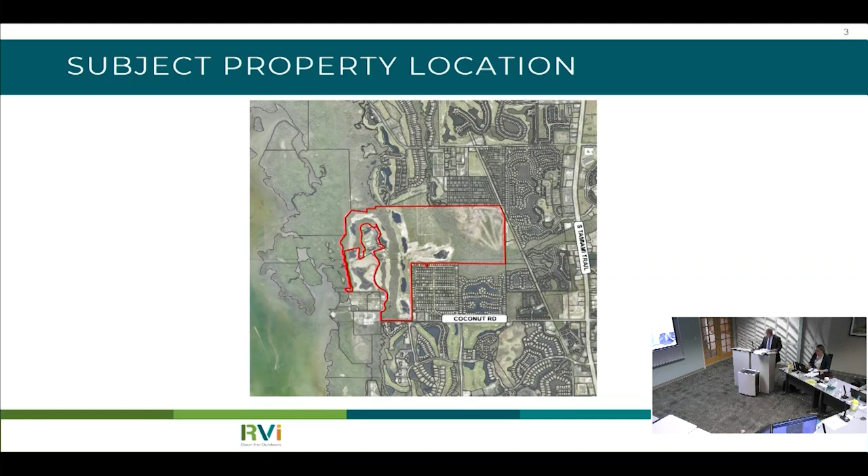The application before you today, it's actually two applications, but I don't think you'll hear the DRI portion today. You have an application to rezone 430 acres to a mixed PD. It's at the terminus of Coconut Road, on the north side of Coconut Road, outlined in red for you. The property is owned by the applicant today, so the acquisition of property is not conditioned upon any rezoning activity for the property.

Overall, the property is 430 acres. It's currently zoned the Kersey Smoot RPD and the Pelican Landing CPD RPD, and we're requesting it be rezoned to the Pelican Landing MPD. I expected there to be some public here today, but this is part of the Pelican Landing DRI. As you know, Pelican Landing has several PDs within it, and we're rezoning portions of two of those PDs to the Pelican Landing MPD.

I'm going to outline, and you'll hear in greater detail, this rezone to MPD modifies density that was originally allocated in the PD, and some intensity for retail, office and hotel. So there are additions and subtractions from the current PDs in the DRI. However, at the end of the day, you'll hear from Ted Treesh, and your staff agreed, that the modifications actually result in a reduction in trips generated from the PD, and specifically Coconut Road does operate at the adopted level of service with all of the additions and subtractions from the PD that you will hear about.

You will see, I believe staff will give you all of the emails that were received, and the primary concerns seem to have to do with traffic on Coconut Road. So we'll be providing you with testimony as to the impacts of what we're proposing, not only within the DRI, but also specifically on Coconut Road.

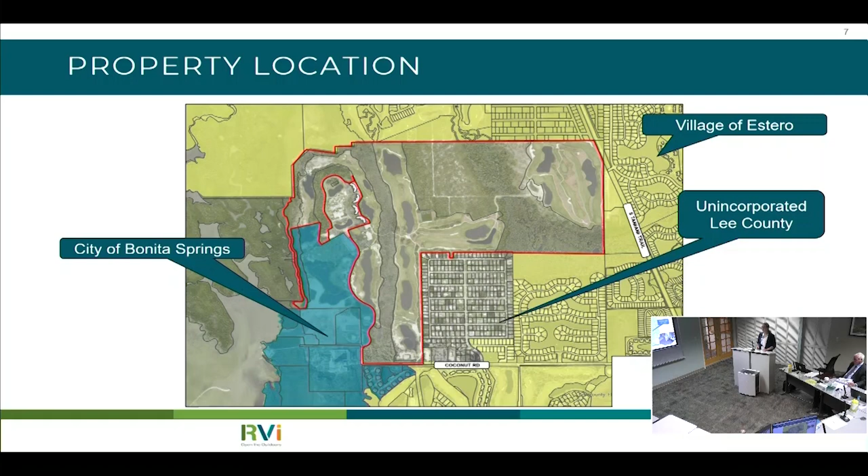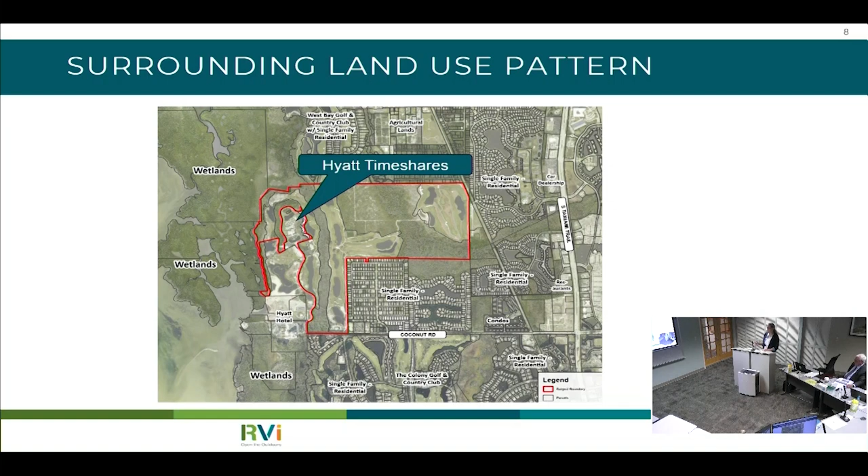Did I break it? No. Oh, I thought... So looking at the surrounding lands, kind of in the donut hole here is the Hyatt timeshares. This was part of the Kersey Smoot PD. We'll see that in a future slide. And that's not within the property.

This single-family residential over here is the Fountain Lakes community. To the north is the West Bay Golf and Country Club. This property here, one of the London Bay owned properties, is known as Raptor Bay. To the south of that, the Ritz residences — you may have seen those towers going up. Again, to the south of the Ritz is the Hyatt Coconut Point. To the south of Coconut Road is the Colony, made up of a number of smaller communities. And our neighbor to the southeast is El Dorado Acres.

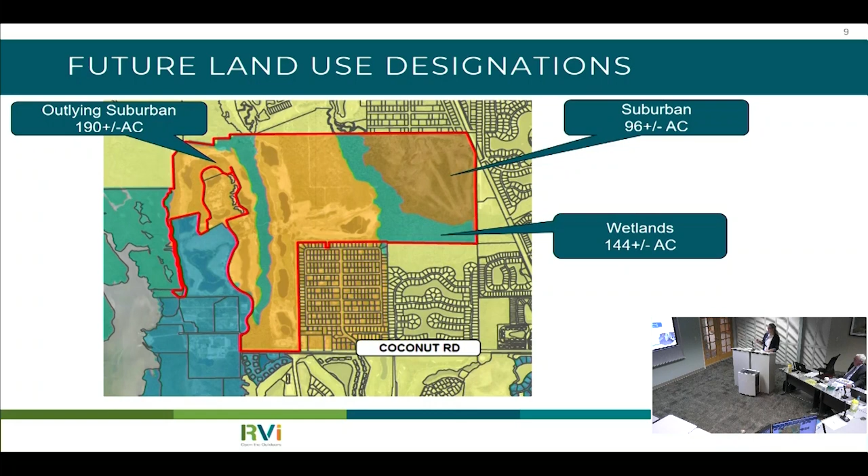So the calculation of that acreage — and actually this acreage here includes the Kersey Smoot acreage as well, and we'll get to why we're including both of those in a future slide. But including that Kersey Smoot donut hole, the calculation of allowable density in those future land use designations is 893 dwelling units. That doesn't include any density derived from any of the non-residential areas. You can see the breakdown of the wetlands as well.

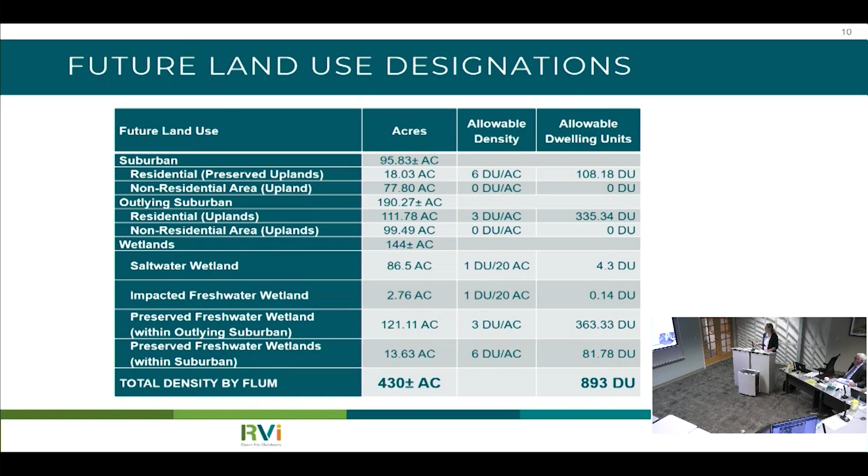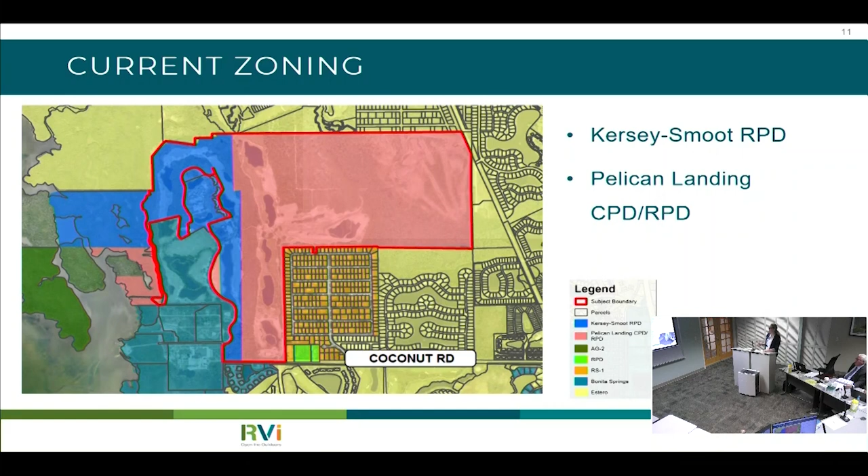Kersey Smoot was accessed by what is now known as Salt Leaf Boulevard, Coconut Point Resort. It's a private road. It included a golf clubhouse, the Hyatt timeshares, and some additional sales centers to the south.

It allowed for 362 multifamily units. 96 of those are currently built. The maximum building height in that PD is 75 feet.

Of the 362 total units allowed within Kersey Smoot, 241 of those units are now owned by the applicant today and have been assigned to the Pelican Landing MPD as we move forward. So they're unbuilt, but assigned to this MPD, available for development under this MPD.

Correct. So that leaves the Kersey-Smoot PD with 121 units remaining. 96 of those are built. There's an additional 25 units. So when you say 121 units remain within Kersey-Smoot, is that then outside this project? Outside of this project. In Lee County or Bonita Springs, but not part of this? In Lee County, but not part of this. Okay.

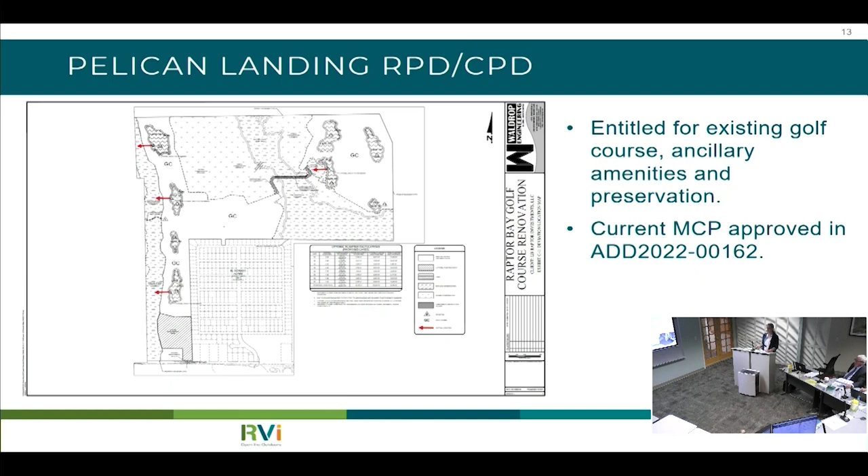So this is all just a part of the Pelican Landing DRI, as Rich mentioned. It's within the overall DRI, and that DRI straddles Lee County, City of Bonita Springs, and the Village of Estero. The DRI is made up of just two separate development orders, one in Bonita Springs and one in Lee County. That Bonita Springs covers all of the remaining lands outside of unincorporated Lee County.

There's been quite a few amendments over time, 16 previous amendments to the DRI. As we've mentioned, we have a companion DRI DO amendment to address the density changes that we're proposing through this MPD. And the majority of the rest of the DRI outside of the subject property today is already built out.

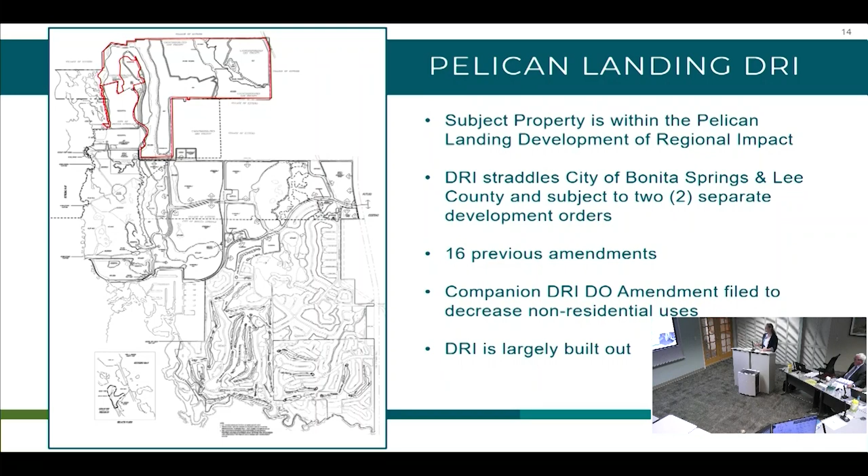So looking at the entitlements within the DRI, stepping away from today's PD, the total approved residential units are 3,912.

Of that, the total unbuilt entitlements for residential units, that's the 241 units from Kersey-Smoot that I mentioned just a couple slides ago. And that's going to be assigned to the MPD? Will be assigned to the MPD today.

I won't run through all the numbers, you have the presentation. But essentially, this column is the overall approvals, and the column to the right demonstrates what has been transferred to the applicant today. So in addition to those 241 units from Kersey-Smoot, they've also obtained some retail and office square footage as well. And that square footage is a part of what? Converted to other uses. I got that.

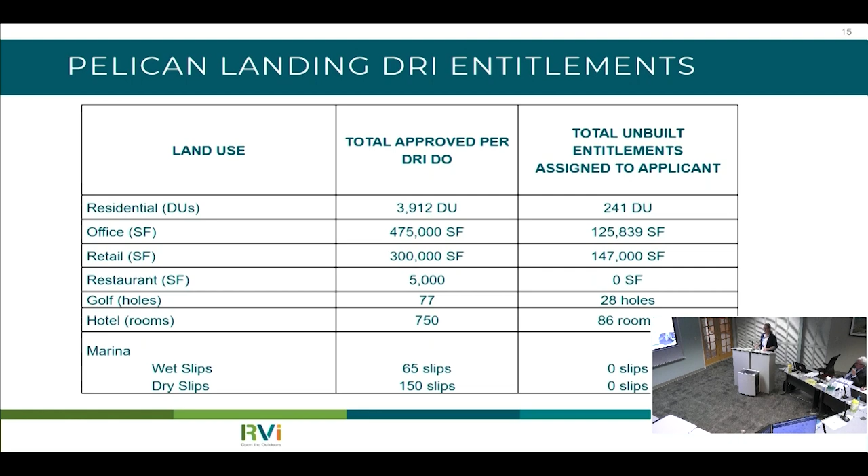Again, going back through the request overview today, for the MPD itself, the total dwelling units is 729 dwelling units. You'll see in the traffic report that assumes 100 single-family units and 629 multifamily dwellings.

The PD will retain 25,000 square feet of office uses. Again, 27 golf holes and 318 hotel rooms. There's also private on-site recreation and accessory uses as well.

The building heights vary based on the different tracts within the MPD, which we'll run through explicitly, but we have the highest heights of 290 feet more towards the west, and they step down as we go further to the east. So 290, 110, and 50 feet.

Oh, wait, go back? Sure. So these represent caps, right? Exactly. What's MU? Yeah, so on the master concept plan, we've got several tracts for development. The MU is the mixed use tract, and that's where we have the ability for those office uses. Retail office. Just office uses. Okay.

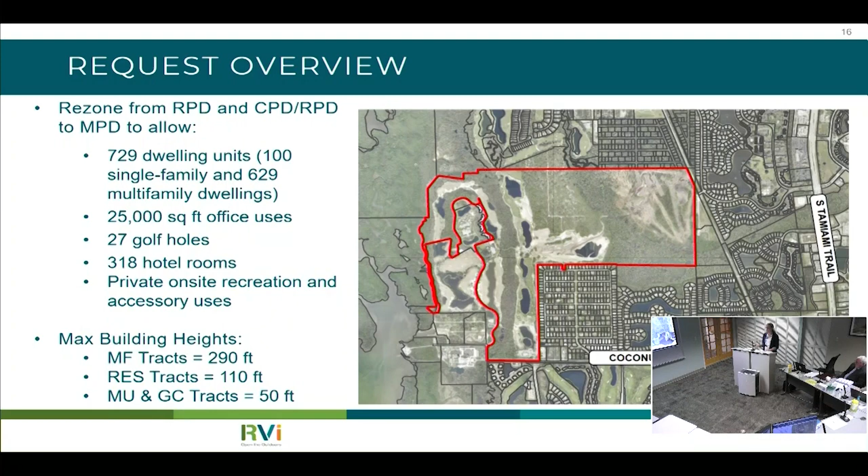I'll try not to get too in the weeds on this table, but again, we're looking at the overall approved DRI entitlements. This is the same column we saw on the previous slide, compared to the total proposed entitlements in the MPD.

And what that represents in terms of increases or decreases in the DRI. So the reduction in office and retail is allowing you to increase the residential and the hotel, but still keep the traffic below the original estimate? Exactly.

And we'll continue to look at that throughout the presentation. As we're looking at these numbers, this 729 includes the 241 dwelling units, and so that's why it is only an increase of 488 units for the overall DRI approvals.

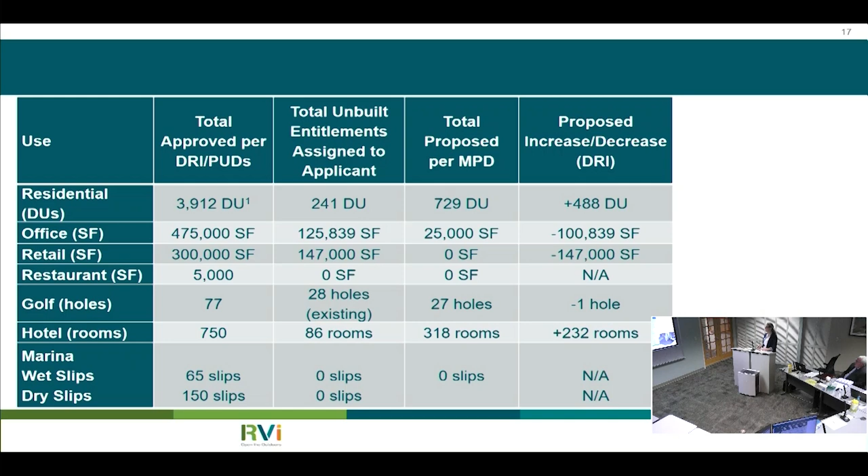I mentioned that the future land use designation table included the remnant portion of Kersey Smoot, that kind of donut hole. This is why we included that in the calculation, because as we're taking some lands out of Kersey Smoot and moving them into this Pelican Landing MPD, we wanted to ensure this entire area was still consistent with the Lee plan in terms of allowable density.

Again, you see this is that same table from before, a maximum of 893 allowable dwelling units. Between the proposed Pelican Landing MPD, today's subject property, 729 dwelling units, and the remaining 121 dwelling units that we went through, it's only a maximum of 850 units. So well within the allowable dwelling units in both of these areas.

Here's the master concept plan. Here's where some of the heights and the tracts will make more sense. Overall, you've got the MU tract, the mixed-use tract, adjacent to Coconut Road. We have a res tract, that's the 110-foot building height that you saw previously. And then the MF tract up here. The remainder is a mix of golf course, stormwater lakes, and conservation areas.

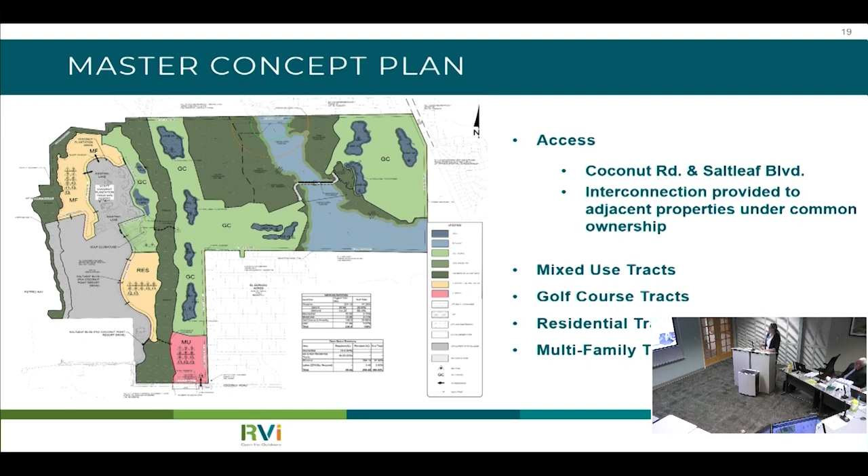We're going to go through some more elements of the master concept plan in the next few slides. So we looked at the proposed building heights in comparison to some of the building heights surrounding the property.

I'll walk through. West Bay has a maximum of 290 feet, which is the same as our MF tract. Raptor Bay, that piece adjacent to us, has a maximum of 20 stories over 2 parking. The Ritz Residences has a maximum of 286 feet. Hyatt Coconut Point, 213. Altaira, 249, and Navona, 254. So on our property within these tracts, you can see the 290, 110, and 50.

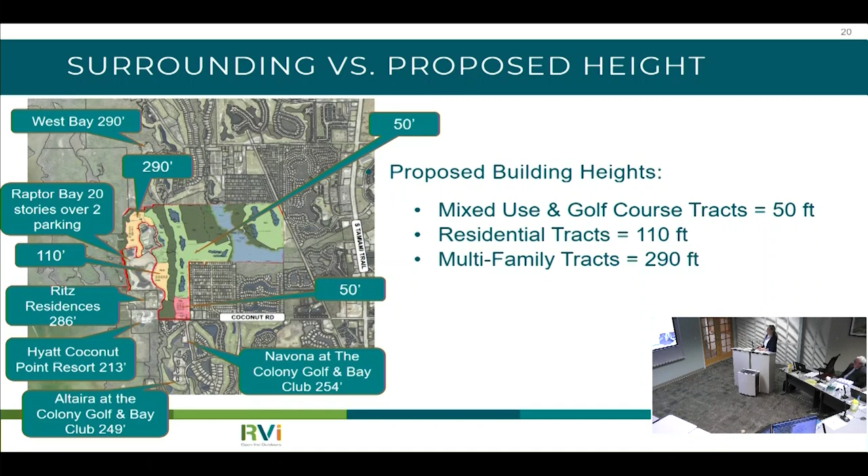Where are the single-family homes going to go? Those will be allowed in the mixed use tract. I see, thank you.

The buffers for the property, there's a combination here. Where there are preserves adjacent to surrounding properties, there's no buffer proposed. Where the golf course is adjacent to El Dorado and West Bay, we have a 30-foot type F. Those buffers are in place now. They were required as part of the golf course redevelopment. There's a maintenance road that runs along here, and so that type F was required for that maintenance road.

We have type D buffers along rights of way, along the private road here, and then along Coconut Road. And then as part of the staff conditions, we have a modified type B buffer between the mixed use tract and the El Dorado acres.

Sorry, a couple more things to point out here. I mentioned this is an existing flowway, so we have a 50-foot waterway buffer on both sides of that flowway. And then we have preserves that vary in width along the western side of the property that provide a buffer to the Estero Bay.

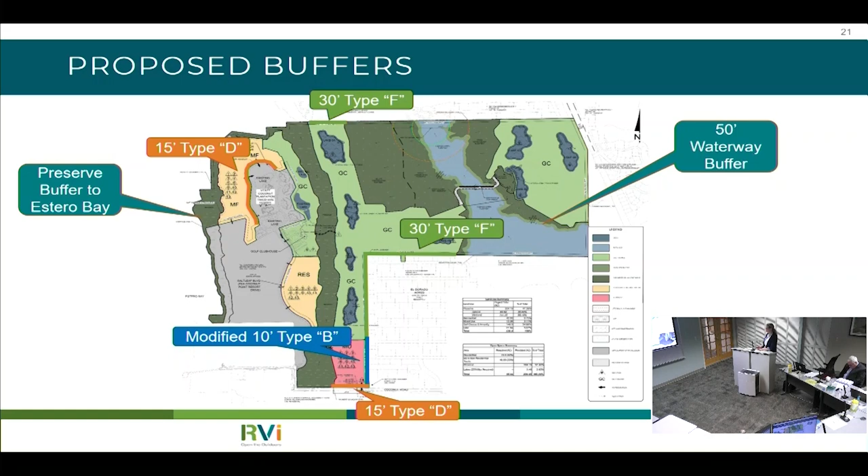In terms of open space, there are 65 acres required for the property, 204 acres provided. And again, I mentioned the preserves demonstrated on the map today are under an existing conservation easement.

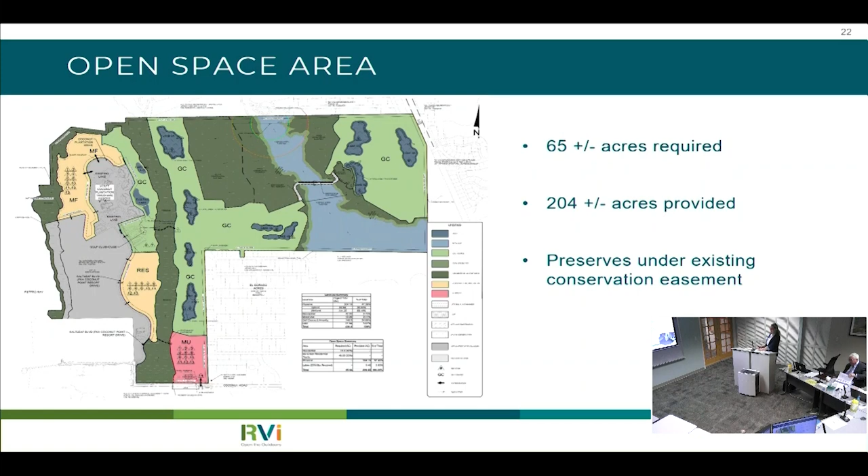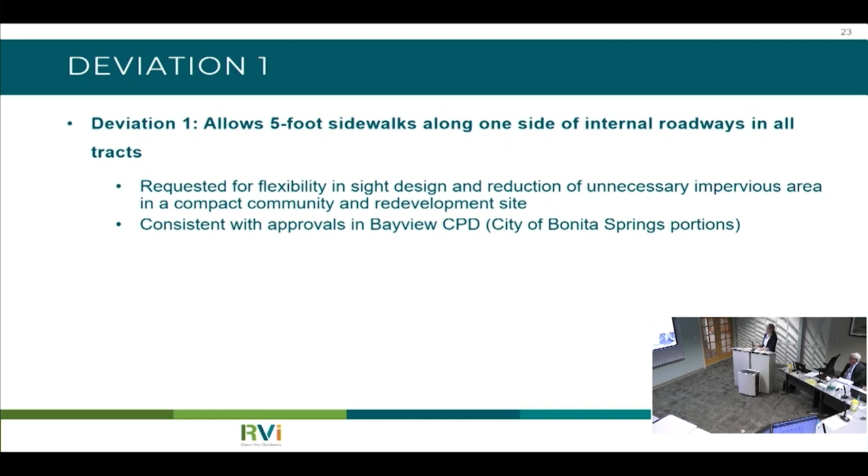We have a number of deviations that I'll walk through for the PD. Many of these have been previously approved for different PDs and ADs along the way, so I'll point those out when relevant. Deviation 1 allows for 5-foot sidewalks along one side of internal roadways. This applies to all of the different tracts, so we're just looking for flexibility in site design, and it's consistent with adjacent approvals in Bonita Springs.

Deviation 2 applies again to most of the tracts, Res, MF, and MU tracts, and allows for individual parking spaces to back onto the right-of-way to allow for on-street parking. This has been approved in the past for those two zoning resolutions.

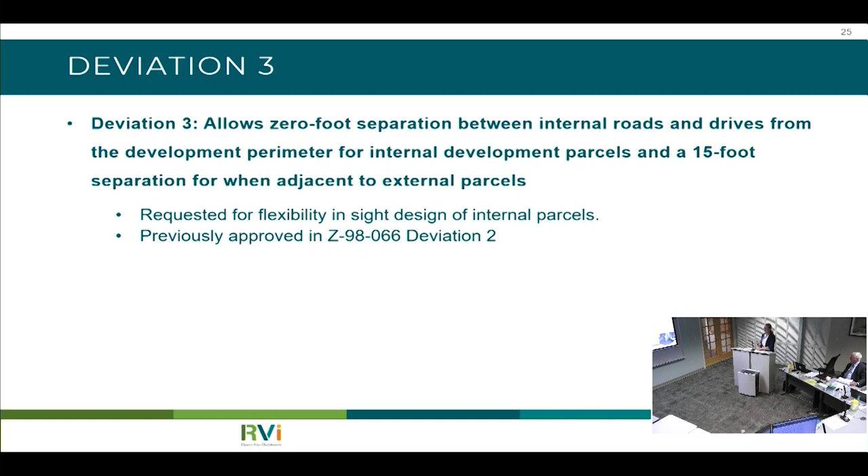Deviation 3 allows for 0-foot separation between internal roads and drives from the development perimeter, and a 15-foot separation when adjacent to external parcels. Again, looking for flexibility in site design and keeping the internal parcels a mixed-use environment, walkable and things like that. This has previously been approved as well.

Deviation 4 allows for a 0-foot setback for identification signs when sight distance requirements are met. This was approved previously and allows for consistent signage throughout the development.

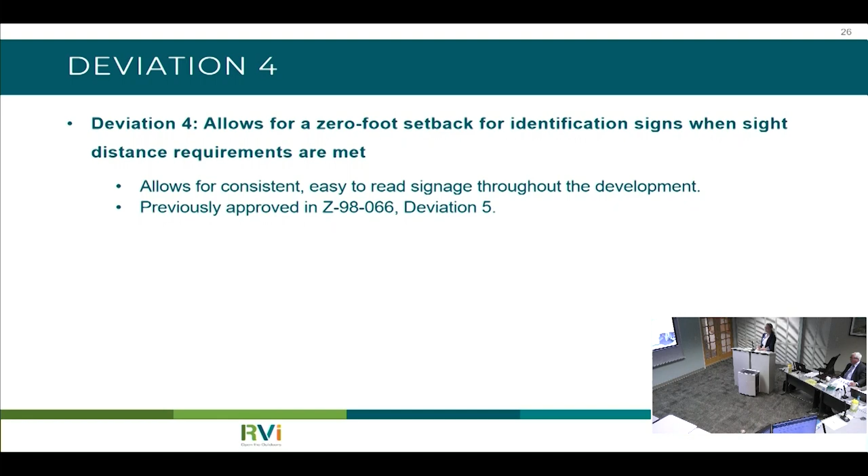Deviation 5, again, allows a 0-foot -- I think this one is wrong, it looks like a repeat. I'm going to come back to that slide at the end. Apologize for that.

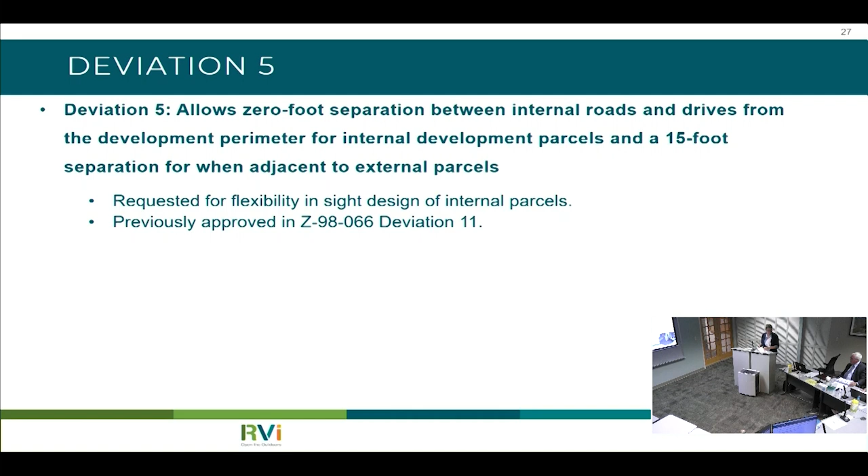Deviation 6 allows for a 4-to-1 slope on all lake banks in all tracks. That's currently approved for the golf course area, and we're expanding that to the remainder of the tracts within the PD.

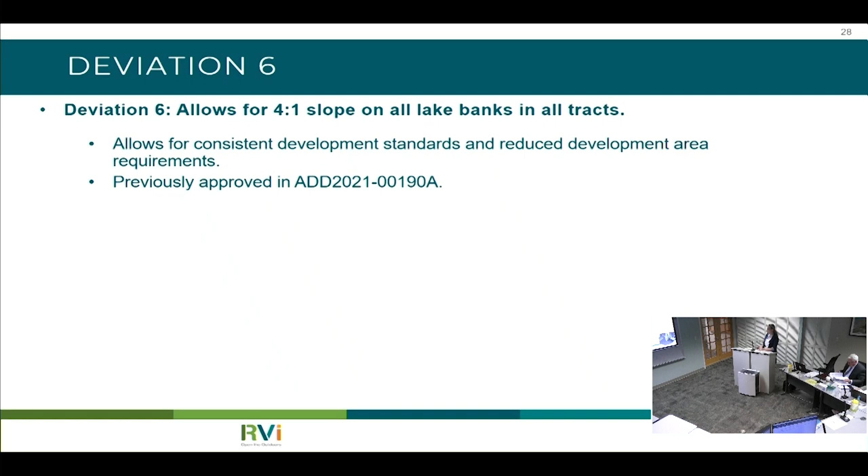Deviation 7 allows for a 5% reduction of the required spaces at the golf clubhouse only. This was previously requested for a reduction in unnecessary parking and approved in a past zoning resolution.

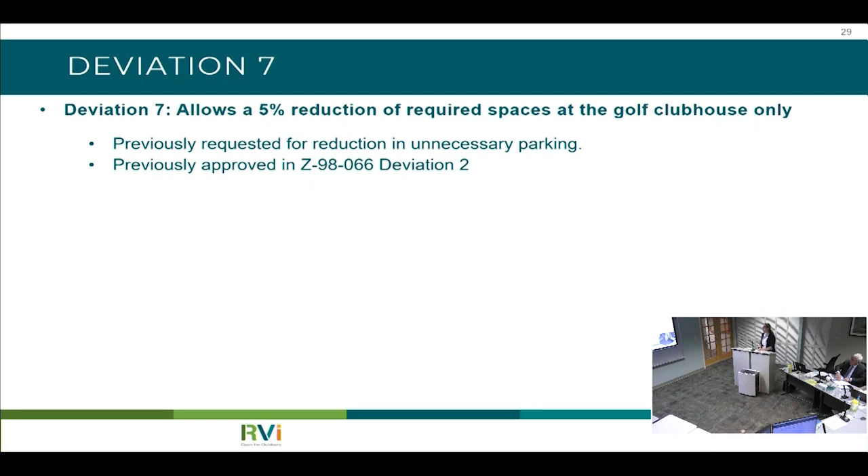Deviation 8 is addressing those maximum heights. The maximum height of 290 feet was previously approved in zoning resolution 94-014.

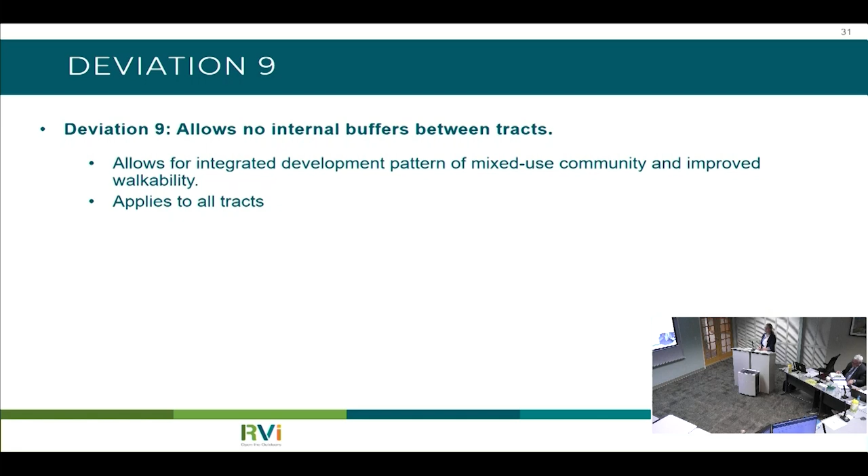Deviation 9 allows for no internal buffers between tracts. It allows for addressing that mixed-use walkability environment that we're looking for. This applies to all tracts.

Deviation 10 allows for the indoor recreation facilities to be parked at one space per 1,000 square feet for those private facilities, where those facilities aren't open to the public and just to the residences. It's intended to reduce the parking that would be required. Some of these facilities will be located within towers, and so obviously don't require trips to get there for the residents.

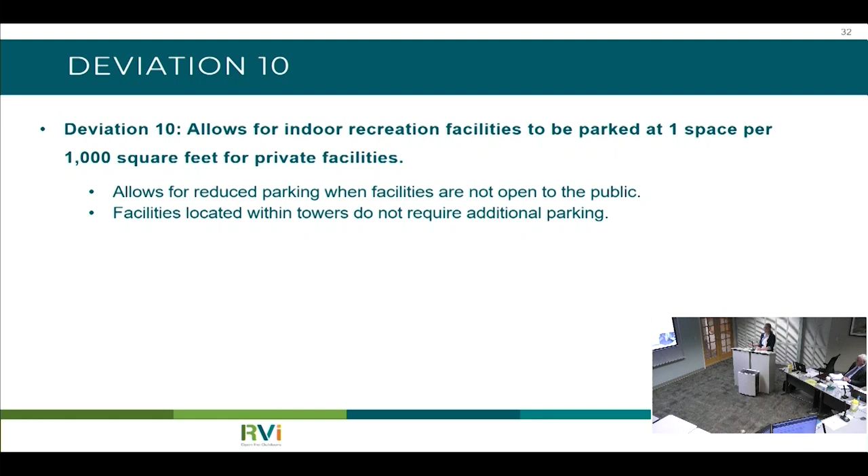Deviation 11 allows a 0-foot setback when adjacent to other tracts within the Pelican Landing MPD, adjacent to the Pelican Landing RPD, CPD in Bonita, and the Bayview CPD in Bonita as well, and a 50-foot setback from the northern property boundary.

In this case, we're in agreement with staff's recommended changes to this deviation.

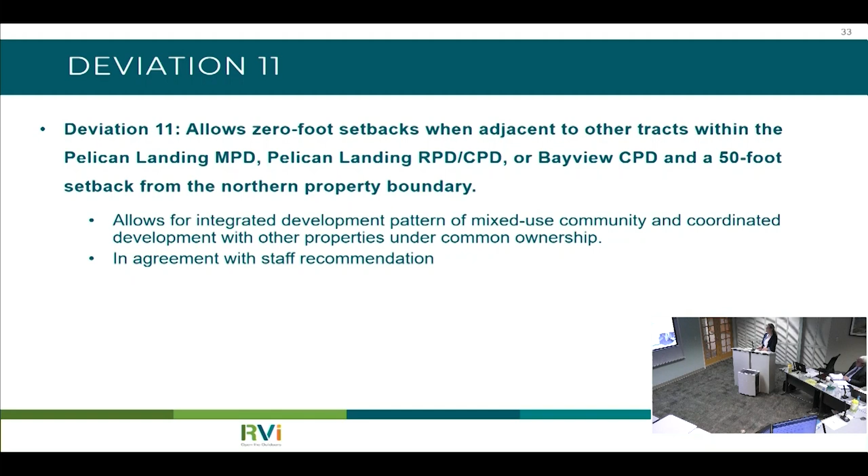Deviation 12 allows for a minimum separation of buildings of 35% of the sum of the buildings for buildings that are greater than 35 feet in height. This allows for some flexibility in the design of those towers. And we have a letter of no objection from the Estero Fire Department provided as part of your 48-hour notice.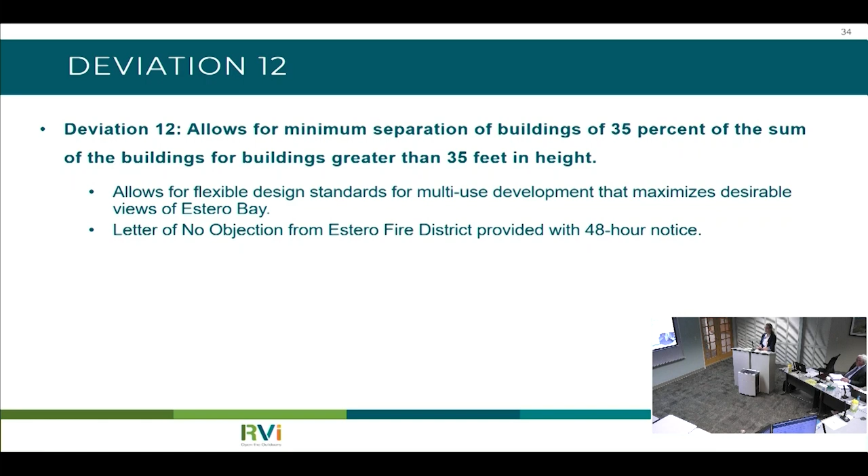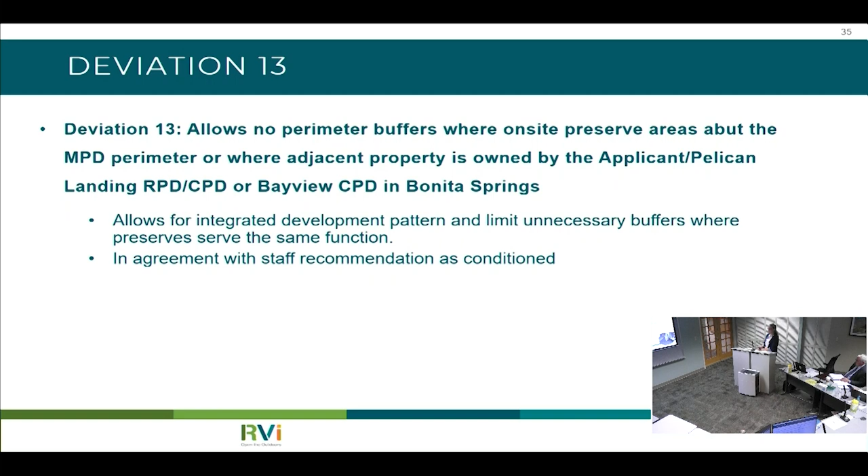With that, I'll turn it over to Shane Johnson for our engineering analysis.

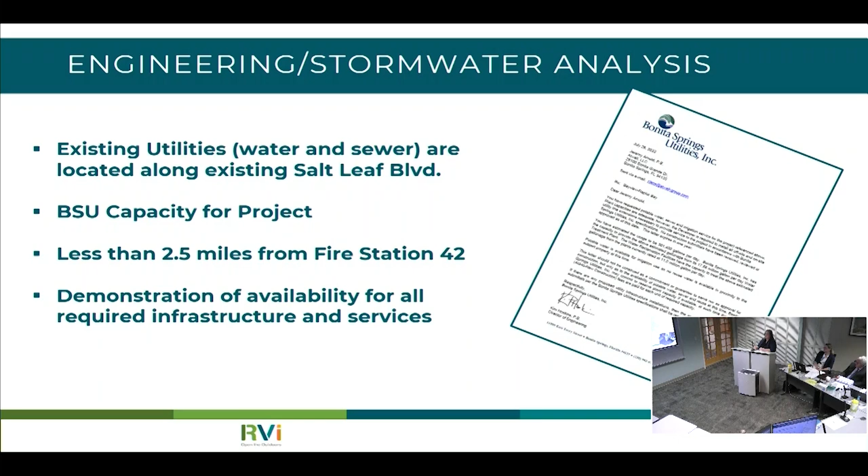So with water, sewer, and public infrastructure, the capacity for the plans that have been presented to you today is there. As far as water management, this is a nice one because we already have our ERP. We submitted a water management permit in 2022 for the proposed changes that London Bay is looking to make on the property. That permit was issued in October of 2023.

Since then, we've gone through countless reviews with the district, and the location of this project is such that it's near Estero Bay, impaired water bodies. So water quality and nutrient removal are the key things we have to look at, and those are the key concerns. With this project, 150% water quality treatment has been provided. We've done a very in-depth nutrient loading study for nitrogen and phosphorus removal. We've met with the district, we've gone through everything, and since then they've approved that.

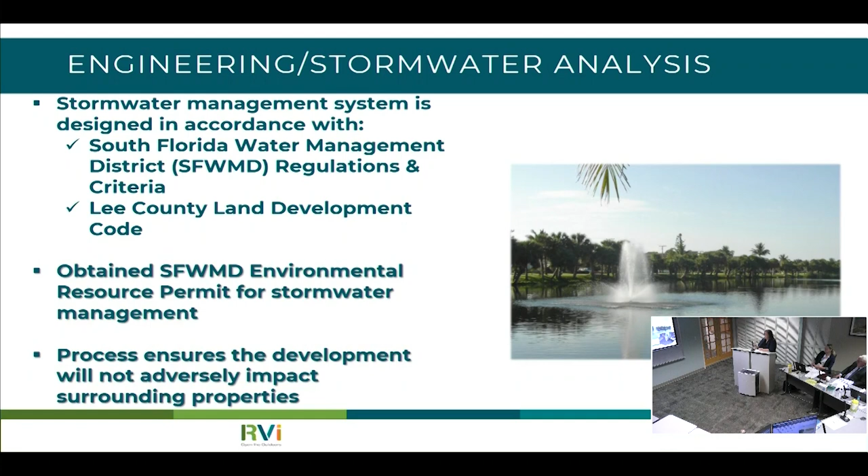For the project, the east side discharges into the slough system, which ultimately goes to Estero Bay. The west side discharges directly to Estero Bay. The water management system is set up so it's perimeter bermed. The runoff stays on the project, gets treated within the interconnected ponds with control structures, and then the treated water gets discharged through a series of control structures at a controlled rate.

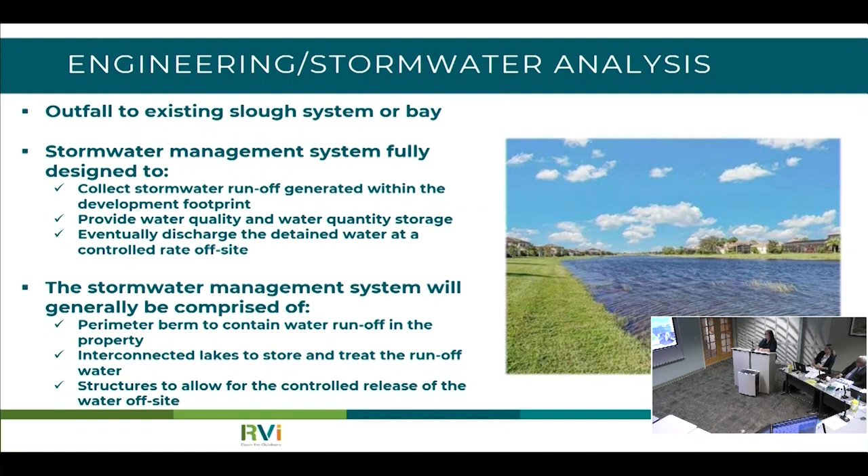We've gone through the review. The design meets all of the local Lee County criteria and the state criteria. We have the water management permit in hand, and it is my professional opinion that the changes they're making to this project will have no adverse impacts to the neighboring properties or the environment. Thank you.

Good morning, Ted Treesh with TR Transportation Consultants. We prepared the traffic analysis in support of this application. That's part of the record and has been reviewed by staff.

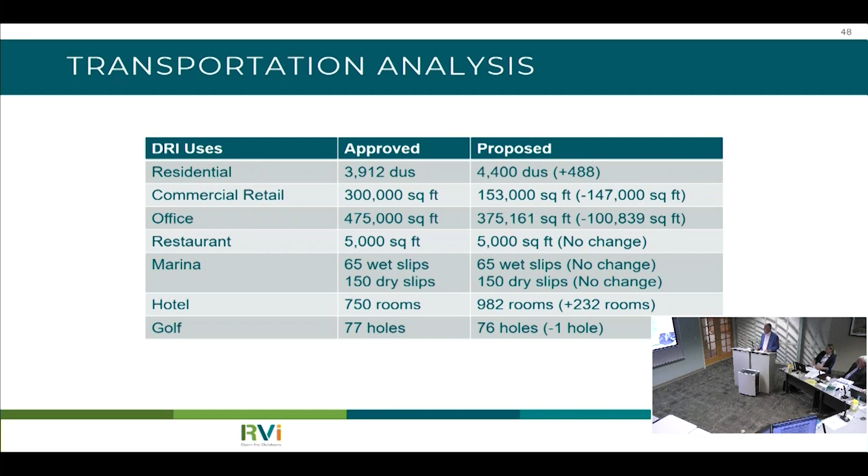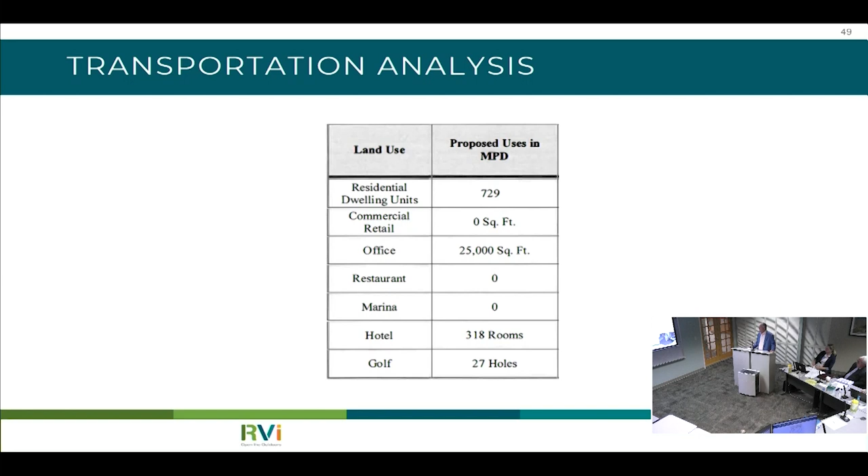So London Bay was very concerned, and we looked at the impacts to Coconut Road in furtherance of our analysis. This table shows, specific to this MPD, the impacts of the uses concentrated on the section to the west of this property that we analyzed. This table shows, in the overall DRI, the reduction in trips. So for the overall DRI, we're consistent.

This DRI goes back a number of years. There was significant transportation mitigation paid as part of the DRI. That's all been paid, and those mitigation impacts have been taken care of in terms of off-site transportation improvements. No additional off-site impacts are associated with this request - it was addressed as part of the DRI mitigation. We will be paying impact fees for the uses, as we do normally at the building permit stage, but there are no additional off-site impacts.

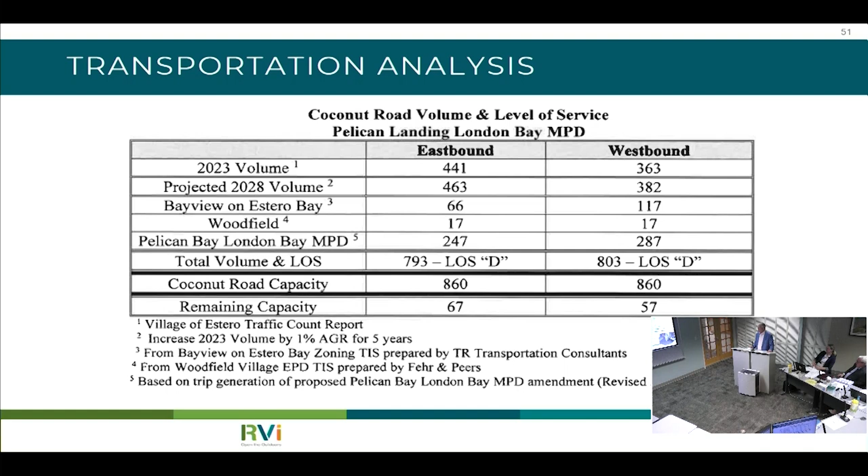Our analysis shows that we're consistent with the goals and objectives of the Land Development Code and the Lee Plan, and staff agrees with our analysis. That's all I have to put on the record.

One of the things this project also participated in was the funding of a traffic signal at US 41 and Pelican Colony Boulevard, which is the intersection just south of Coconut Road and US 41. The DRI, which we are part of, has funded the construction of a traffic signal at that intersection.

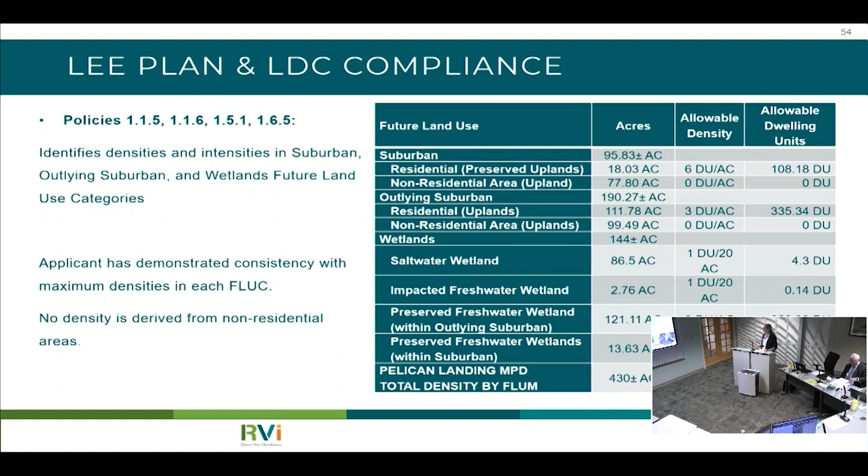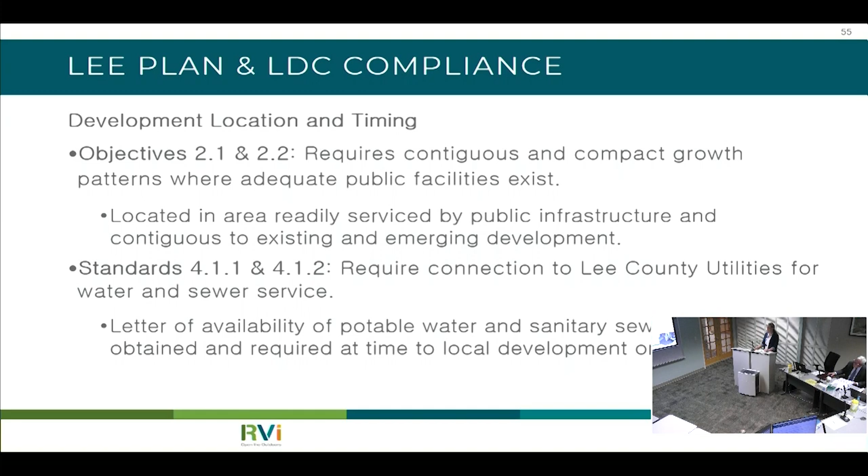Objectives 2.1 and 2.2 require contiguous and compact growth patterns. This is an area that's readily served by public infrastructure, and it's contiguous to a lot of existing and emerging development in the area. Standards 4.1.1 and 4.1.2 require connection to Lee County Utilities for water and sewer service. We do have a letter of availability for potable water and sanitary sewer.

Goal 5 is related to residential land uses. Policy 5.1.2 prohibits residential development where physical constraints and hazards exist. Policy 5.1.5 protects existing and future residential areas. So for these policies, we've walked through some enhanced buffering for the adjacent residential areas. We're, again, readily serviced by public infrastructure, and we have a letter of availability.

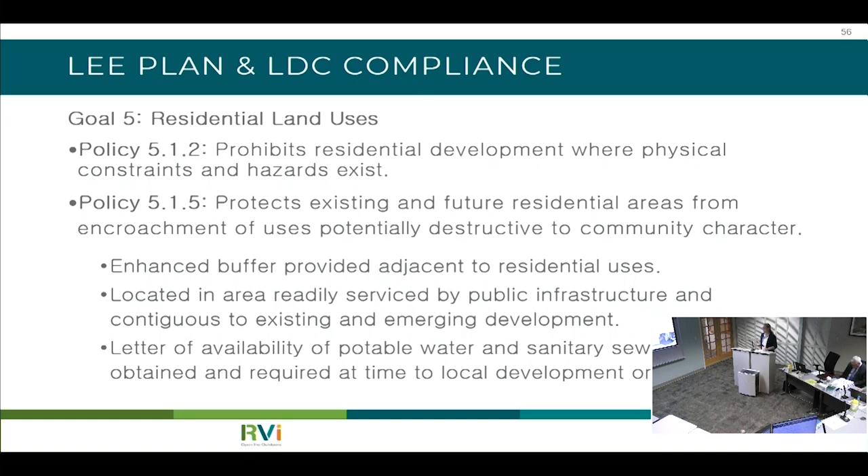The surrounding and proposed building heights are consistent. We've maintained our highest height consistent with some of the surrounding approvals. We've taken a step-down approach as you move more towards the single family adjacent to us. So our highest heights are along the bay, lowest where we're adjacent to residential neighbors.

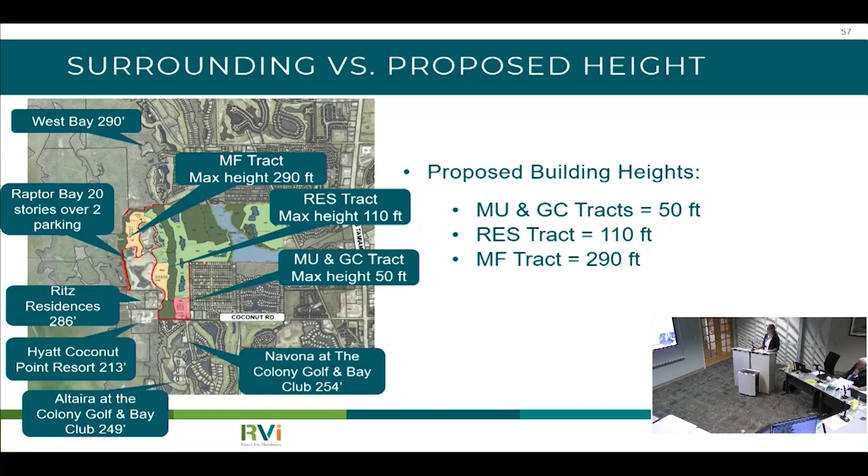In particular, wanted to look a little closer at this mixed-use tract where we have a maximum height of 50 feet. That is where we're adjacent to the El Dorado Acres subdivision. El Dorado itself allows for a maximum of 35 feet. This community here, Cielo at the Colony, is just to the south of us. That allows for a maximum of 126 feet. We also saw on previous slides that there's an enhanced type B buffer along the eastern property line of the mixed-use tract.

All right, you want to explain what that is? Yeah, so it's a type B buffer. It's a 10-foot type B buffer. All of the same plantings that you would see in a type B buffer, that's 10 feet. And what would that include? I don't have the planting requirements for a type B, but we haven't requested a deviation from those typical type B plantings.

Goal 6 is related to commercial land uses, so it addresses the review criteria for commercial development. In this case, we have provided for a reduction of commercial and office square footage in the DRI to ensure that there's no impacts to the surrounding transportation system. The buffers meet or exceed the LDC requirements, and the utilities are available from Lee County Utilities. Our maximum building heights, we've also demonstrated, are comparable to those surrounding.

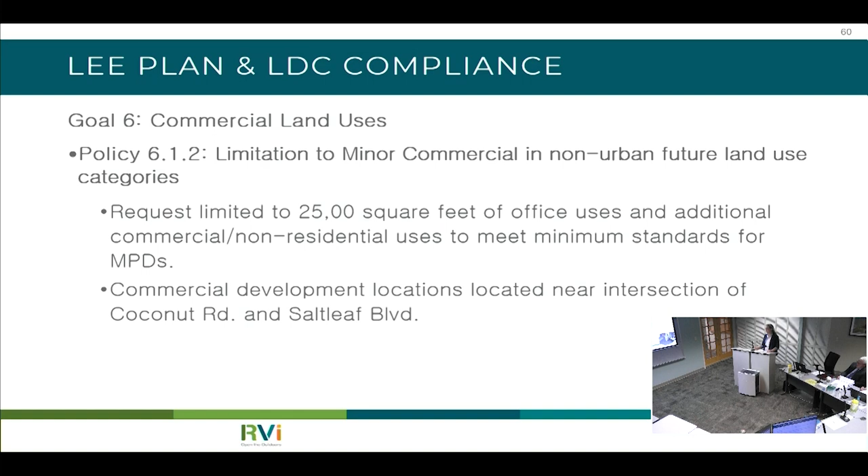Policy 6.1.2 is related to a limitation to minor commercial development within non-urban future land use categories. Our request is limited to 25,000 square feet of office. Well, you're really not in a non-urban classification—you're outlying suburban, that's an urban classification. The commercial development is also located, as Ted mentioned, near the intersection of Coconut Road and Saltleaf Boulevard.

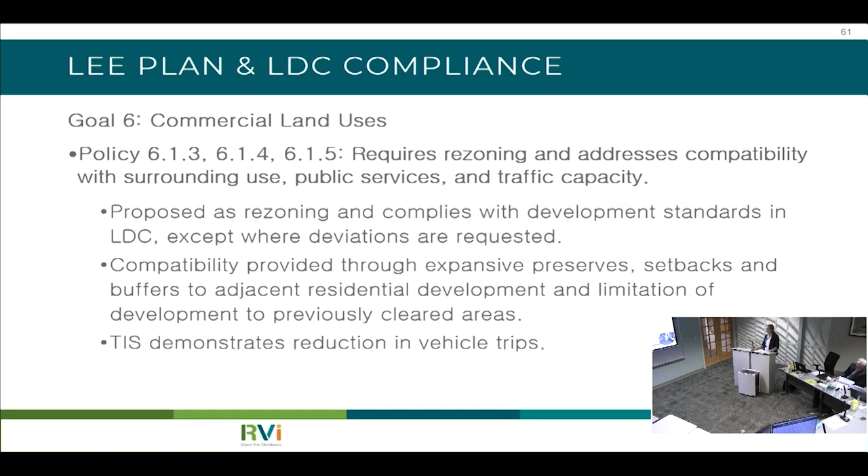Policy 6.1.3, 6.1.4, and 6.1.5 require rezonings to address compatibility with surrounding uses, public services, and traffic capacity. The proposed rezoning complies with the development standards in the LDC, except where we have deviations requested. The compatibility with surrounding neighbors is provided through pretty expansive preserve areas, setbacks, and the buffers that are throughout the development. Development in the PD generally is limited to areas that have been previously cleared, and we have not impacted any of the existing preserve areas. And as Ted walked us through, the TIS demonstrates a reduction in overall vehicle trips.

Looking more at Goal 6, policies 6.1.6, 6.1.7, and 6.1.11 require open space buffering, landscaping, encourage commercial development in infill areas, and encourage the revitalization of deteriorating commercial areas. Again, we've got the buffers on the screen demonstrating buffering, open space, preserve areas. We've also mentioned that the development is limited to the existing golf course areas or areas that were previously programmed for development.

Regarding policy 11.1.2, to address calculation of density in mixed-use developments, again I've mentioned that we have not obtained any density through the non-residential areas of the PD.

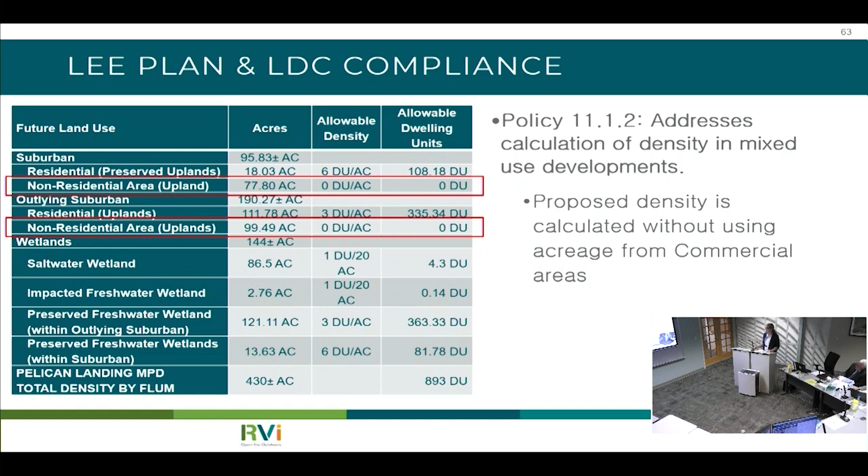And we are consistent with the future land use categories' allowable densities. This is another repeat slide demonstrating how we calculated that density, the overall increase or decrease to those intensities and densities in the DRI, and how they relate to the proposed MPD.

Policies 59.1.3, 60.1.1, and 60.1.2 address floodplain regulations. We have no development proposed in the floodway. The surface water management system is proposed to provide treatment and protect groundwater, and wetland and upland preservation maximizes protection of the natural resource, natural surface water flowways, and other associated habitats.

Continuing to look at floodplain regulations in the Lee Plan, there were a couple of additional policies as well, 60.4.1 through 60.4.3.

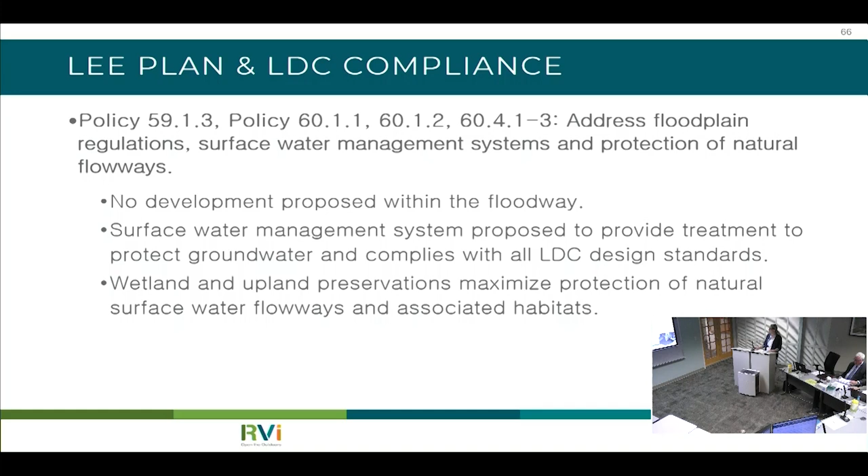Policy 61.1.1 and 61.1.6 address management of fresh waters and require surface water and low quality groundwater to be used for irrigation where reuse is not available. The applicant is obtaining an ERP from the South Florida Water Management District. The surface water management system is designed in compliance with the Lee Plan and LDC, and surface water is proposed for all irrigation of landscaping, and potable water will not be used for irrigation purposes. Reuse water is not available in this location.

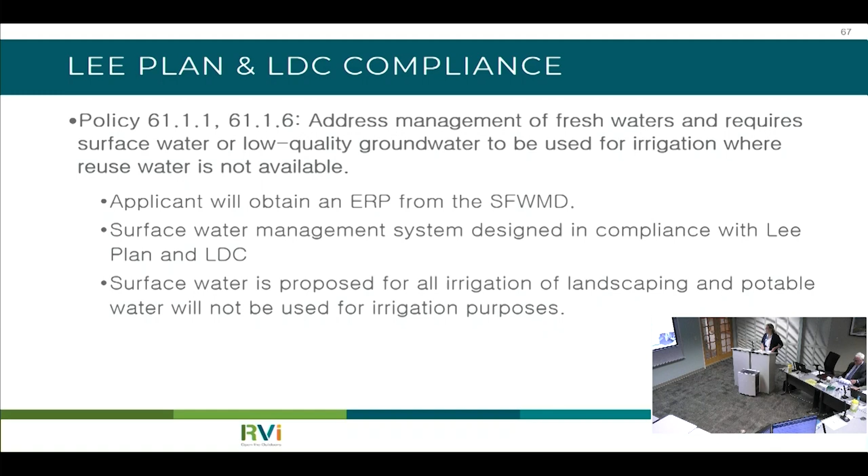Policy 100.1.1, 100.1.2, 101.3.2, and 101.3.4 address protection of wetlands. They restrict development in the coastal high hazard area and require information regarding hurricane evacuation and shelter information to be provided to residents. As we've mentioned, wetlands are protected throughout the on-site preserve areas.

The ERP requirements and on-site surface water management system will be in place as well. The site protects over 204 acres of preserve areas, including mangrove wetlands, and there are no wetland impacts proposed within the coastal high hazard area.

Policies 123.1.5 through 123.2.6, 123.2.8, 123.2.13, and 123.2.15 address protection of natural habitats.

Shane walked us through the preserve areas and the protections that have been in place for the wildlife species on site or potentially on site. Proposed preserve areas exceed the LDC requirements, and we're preserving large contiguous areas of habitat.

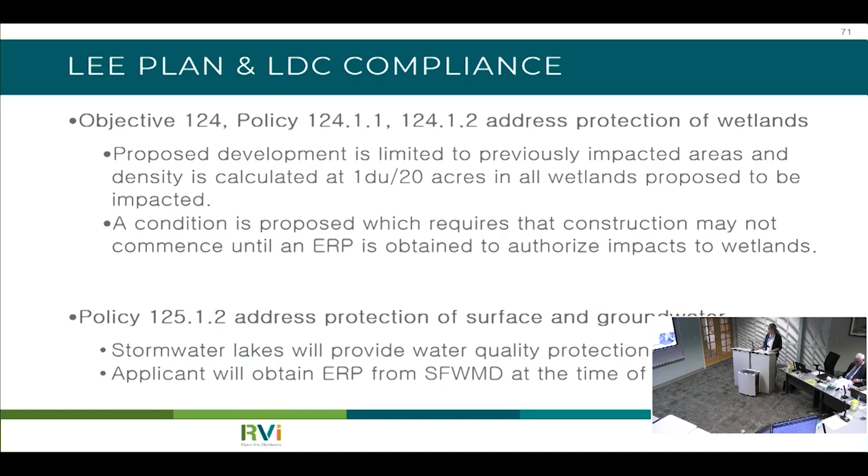We're just pulling that listing out and adding it to the end of the list as a separate standalone item. It still identifies that they're accessory to the principal uses within the MPD only. The staff and the applicant are in agreement on this change.

And then, as I mentioned, the modified type B buffer is provided as a change to condition 5 to allow for that buffering to occur along El Dorado Acres.

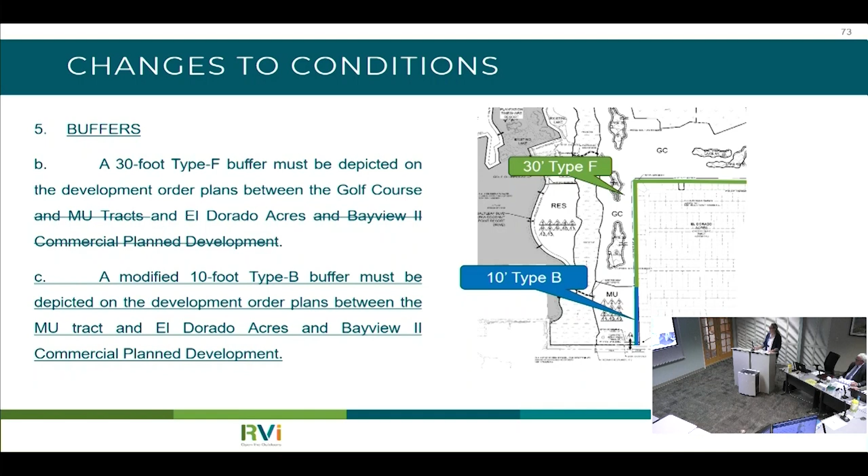With that, it's my professional opinion that the Pelican Landing MPDs met all of the applicable standards and demonstrated consistency with the Lee Plan and the Land Development Code. Thank you, and that's the end of our presentation. As we've noted, there's a staff recommendation of approval. We're in agreement with all of the staff recommendations and the staff report. We've demonstrated consistency with the Lee Plan and the Land Development Code, and we're compatible with the surrounding land use pattern, so we're seeking approval as requested and amended in the 48-hour letter.

And your testimony was staff is accepting of the requested changes to the conditions in your 48-hour letter? Correct. With that, we're open for any other questions. I know Shane had to respond to questions as well. And Beth, could you explain the composition of the committee? Yes, it's in my presentation. We have members of the public here in it.

Hello, Shane Johnson for the record. Yes, with respect to your question regarding the wood stork, there were no wood storks observed on the property. However, the property is contained within a defined area called a core foraging area for the species. I believe it's a 25-kilometer area from an existing rookery. So if that buffer zone overlaps a project that has wetland impacts, then mitigation for the wood stork is typically required.

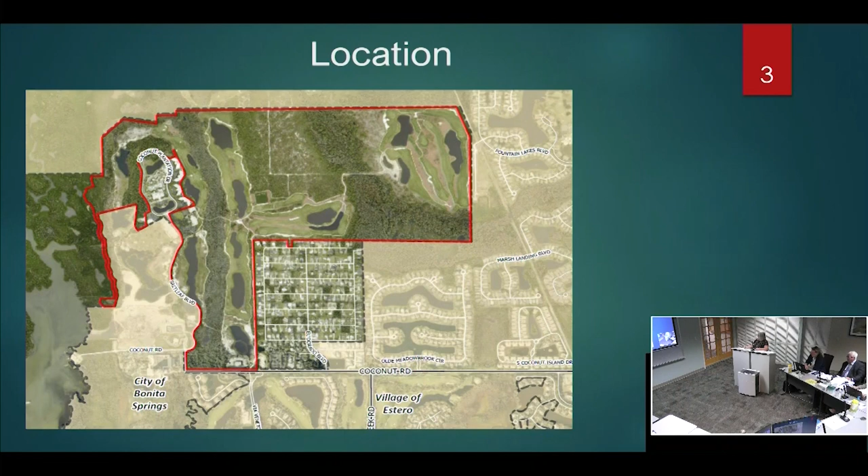So looking at the location, this is the zoning case. Outlined in red is the Pelican Landing rezone to mixed-use plan development. As the applicant stated, it's in 3 different future land use categories. This is important to look at not only from the land use aspect, but also to ensure that what is going on in the DRI, even if we didn't have a DRI and were going on the future land use category, we would be consistent with the density in the Lee plan.

So it supports itself. Yes, if the DRI was rescinded tomorrow, this section would be able to support itself with the suburban, outlying suburban, and wetlands future land use category. And that is stated in the DRI staff report in detail.

So this is the development of regional impact, or the DRI 2024-00001. This is the expanse of the DRI. You can see it goes south of Coconut Road, and there's a small little island piece down here. So what does that mean?

What it means is the breakdown of that density. Right now, as we sit here, the DRI is approved for 3,912 dwelling units. The applicant wants a total of 4,400 to go into the DRI. These are the entitlements, and the applicant did a nice job going over this because it gets kind of confusing. This DRI has been around since the late 80s, early 90s, so it's had a lot of different changes over the years, one of which was to increase the density to 4,400.

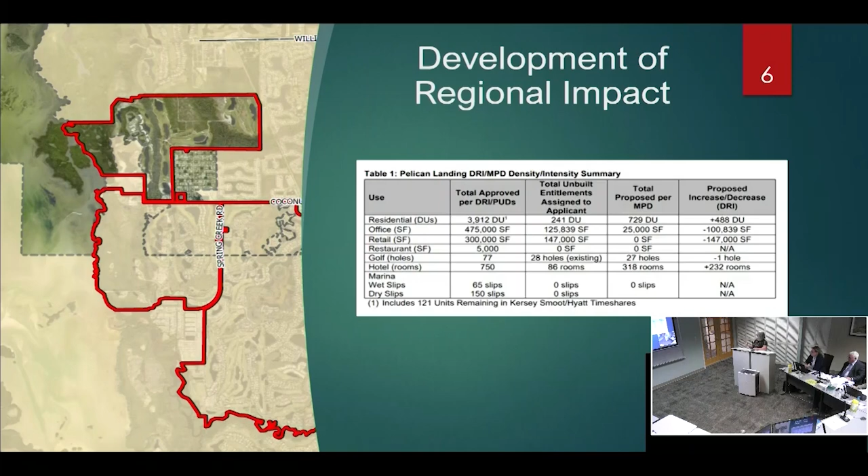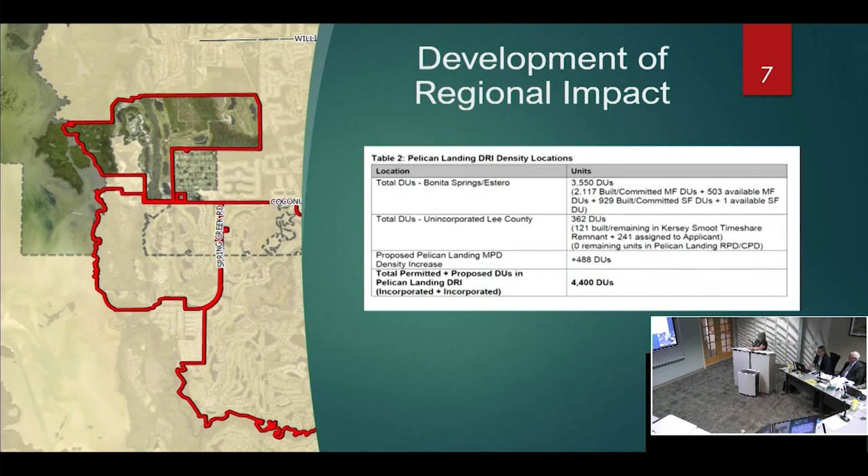So this is looking at the development of regional impact and the lay of the land on the units to get to the 4,400 that's being requested. It goes through the breakdown of what's available, what's committed, and the same thing for unincorporated. It splits it into Bonita Springs, Estero, and unincorporated, because this thing spans 3 different jurisdictions.

This is the chart that goes over the future land use category. Ms. Franz went over this in detail, showing that 893 dwelling units could be permitted on this site. And with the 241 and the 488, you're well under this number.

So looking at the height, this is the master concept plan for the subject property. Really all it's doing, as stated, is the golf course, the preserve, the flowway, all the conservation easements are already in place. The only thing the applicant is doing is coming in and coloring in the MF, the RES, and the MU with uses that are in the schedule of uses. And then the height is changing.

As they went over in detail, from the north to the south, the height decreases as it moves closer to El Dorado Acres, which has 35-foot single-family residential homes existing on site. So you can see that multifamily and single-family could go up here. Towers could be built at 290 feet. Residential towers could be built at 100 feet. Townhomes and single family, where the golf barn is currently, could be single family or offices, and I believe townhomes can also go in here at 50 feet.

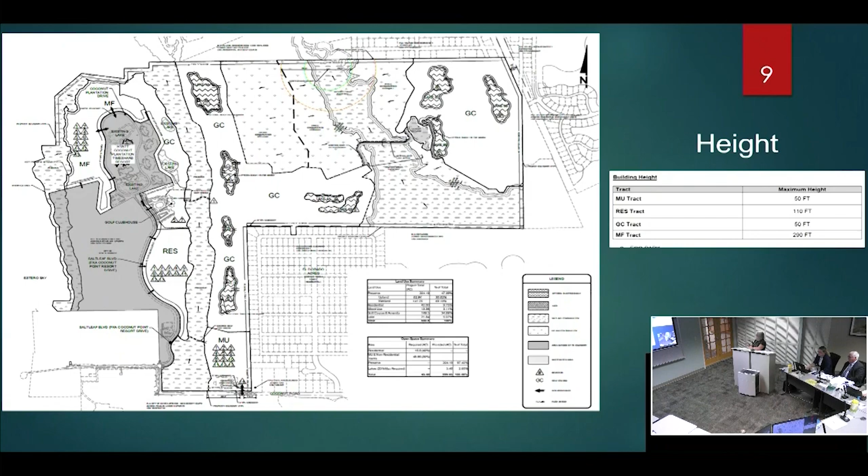As stated by Ms. Rock, there is public services. Bonita Springs Utilities provided a letter of availability. There's an estimated 301,400 gallons per day estimated for the usage, and Bonita Springs Utilities has stated that they have the capacity for the sewer, potable water, and the irrigation.

The police and fire are located in close proximity, about 2.5 miles. This is the fire station and the emergency management. And this star right here is where the sheriff's office is located. Our property is right here.

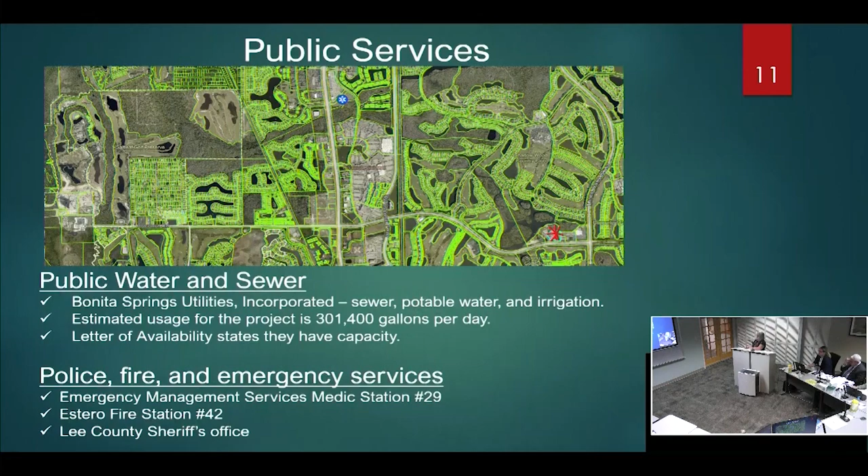Through the 48-hour letter, the schools provided a letter saying that they do have the availability.

Spring Creek Elementary School is 3.5 miles to the southeast, and Estero High School is 3 miles to the northeast. There is public transit along 41, with LeeTran serving US 41 north and south. There are also bikeways, greenways, and a shared use path along 41 within the Lee plan. To get there via Coconut Road, the applicant will be required to demonstrate sidewalks along Coconut Road for their property.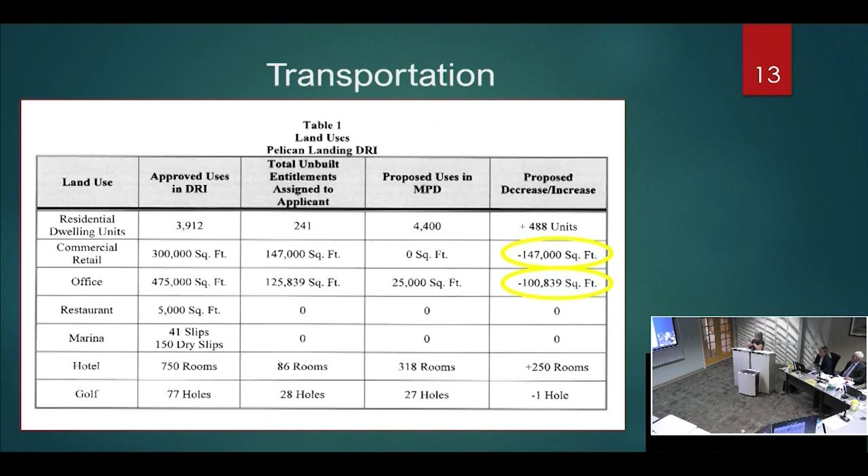Transportation went over this in detail. Mr. Treesh did a good job showing that this is not going to negatively affect traffic on Coconut Road. Coconut Road is operating at level of service D with or without the project. By reducing what's currently allowed on the site and balancing that with the increases in density and hotel rooms, we get no net increase or loss. This shows the difference in internal trip capture.

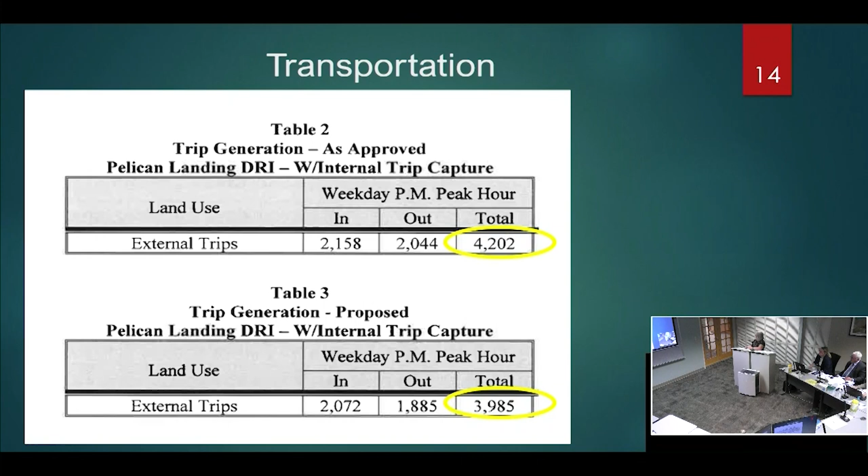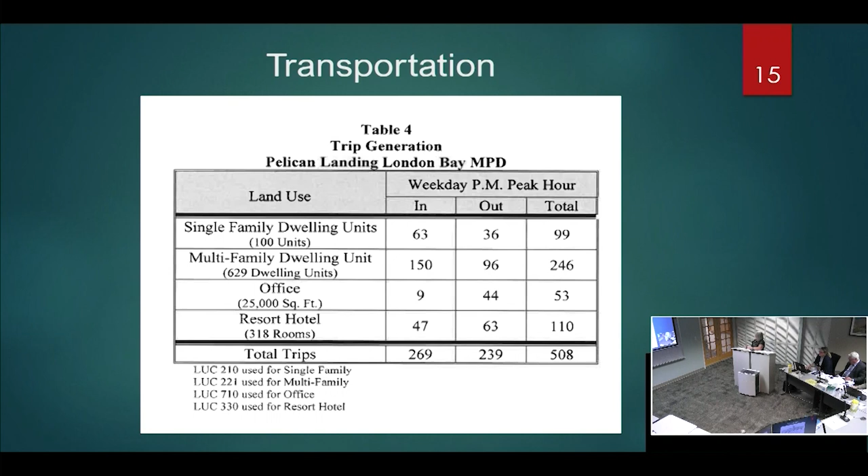This is directly from the traffic impact statement, comparing the approved DRI versus the internal capture. For the proposed project, there's a reduction. This is the peak trip count for the PM weekday peak hour trips, showing what capacity would be needed on those roadways, and this shows level D with or without the project.

Looking at deviation 14, I'll skip around these deviations based on what we're addressing. Deviation 14 was for the interconnectivity, the connection separation. DOT provided a memo stating they were okay with this deviation because it lines up with the existing alignment of Via Veneto Boulevard, which is right across the street.

On the environmental side, as Mr. Johnson stated, everything's in place. There's a bald eagle management plan, the flowway is intact, and all the preserves are in conservation easements under maintenance right now with the state. They've already been inspected and are under maintenance—this has been going on for a long time.

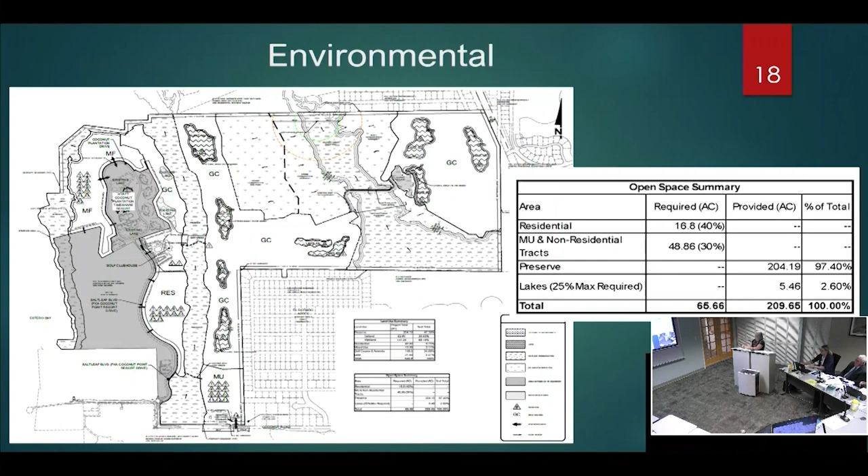There are several deviations already approved as part of past zonings. Deviation 6 was one of them, for the lake bank slopes. This was developed and built prior to the code change from a 4-to-1 lake bank slope to a 6-to-1 lake bank slope, so we've granted deviation 6 to allow the lakes to remain at 4-to-1.

Deviation 9 is for internal buffering. If this were to come in fresh, there would be walls and 30-foot buffers required between single family and commercial uses, roadways, and things like that. Because this is a mixed plan development, we're granting a waiver allowing the internal buffering requirements to not apply.

Deviation 13 is for perimeter buffers. When preserves abut perimeter buffers, we allow the preserves to act as the buffer. This deviation allows that to be granted around the perimeter of the development so those preserves can act as the type F buffer in some instances. Areas that don't have preserves will have to meet the land development code, so there are some sections periodically along the north abutting West Bay where a type F buffer is required.

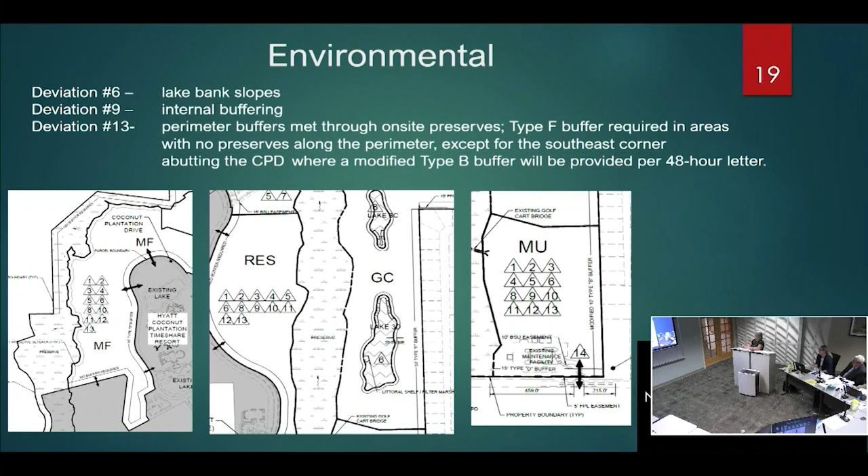So there's a number of deviations from parking, sidewalk, and signage that the applicant went over thoroughly. 5-foot wide sidewalks along one side of the internal roadway. This was previously granted on another section of a PD. We're just granting it again.

Deviation to back out parking onto right-of-way easements and all tracts, that was previously approved. We're carrying that forward. 0-foot setback from right-of-ways on all tracts. We're granting that easement. This is a mixed plan development, so you have this intensity inside the development for the buildings and uses, and then as you work to the perimeter, you have your buffers going in that will kind of separate that intensity.

So deviation 7 is the 5% reduction in parking for the golf clubhouse only. This was previously approved. This is just giving a little reduction because this is a mixed use, because some of these, the golf club, they're in golf cart capability, walking capability to get there. So the reduction was granted previously.

And then deviation 10 is to allow 1 parking space per 1,000 square feet of floor area for private rec integrated into the mid and high-rise buildings. This is because some of these buildings will have their recreation facilities built in them. So by reducing that parking, because they're already in their building and it's walkable to be able to get to that.

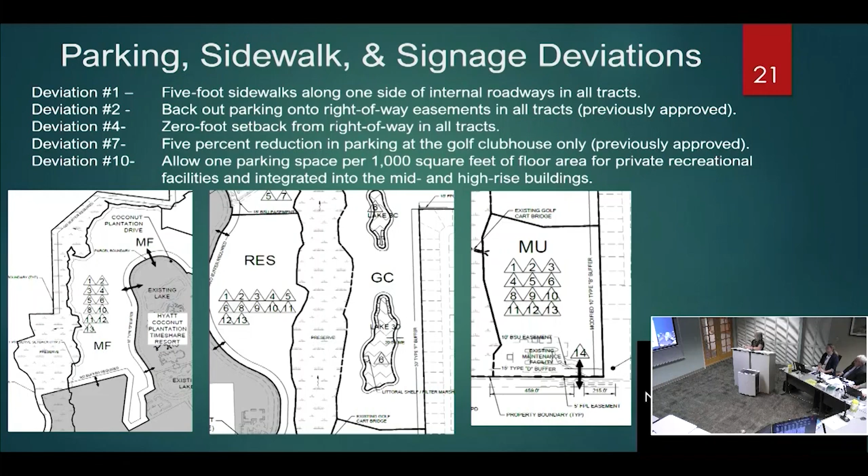So development pattern, this is going over the setbacks, the building separation, and the height. So looking at deviation 3, it's a 0-foot separation for internal parcels and a 15-foot separation for external parcels. This was previously approved and carried over.

The allowance in deviation 5 for the 20-foot distance between recreation centers and ancillary facilities and the residential dwelling units, this was previously approved, a 20-foot distance. Because you are entering into a mixed plan development, this all goes back to that mixed plan development kind of a scenario.

And then Ms. Fran's testimony on deviation 8 for the height. It should be noted that the previous approval allowed a 20-story building over parking with 15% open space for each multifamily and a minimum building separation of 125 feet. So there's a building separation deviation that is deviation 12.

And so when staff was reviewing deviation 8 and 12 to see how it applied in this particular plan development, we were concerned with fire. So with your separation between buildings lessening, would the fire department be able to get in there with a truck with the ladder? And they provided, as part of the outstanding issue in the staff report in the 48-hour letter, the fire district, Estero Fire District, provided a letter of no objection for those distances.

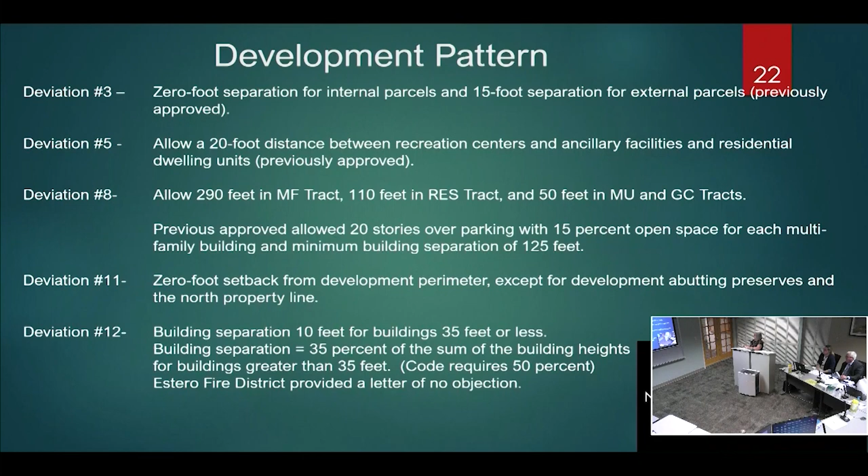So the master concept plan shows you the layout of where F buffers are located and where they're not, and the runaround of the perimeter of this site and the varying compatibility taking place. The highly sensitive area staff paid attention to was the El Dorado Estates, because these are 35-foot tall homes abutting the golf course, and this is going to change from a golf cart barn to commercial offices, single family or townhomes, so that'll be 50 feet. That's where the B buffer is, 10 feet, because of that vantage, and then you have a 30-foot F buffer.

Is there no buffer between the golf course and El Dorado right here? No. What about the golf course? It's not already developed? Yes. So that's just acknowledging existing conditions? Yep, this is all what was previously conditioned all the way around. The applicant's not changing anything.

So we have F buffers or preserves meeting the requirement. There's no buffer over here, and then there's an F that runs along here. So B has no wall, it's just 10 feet landscaped, and the shrubs are increased in height to 60 inches. So this is the lay of the land on that.

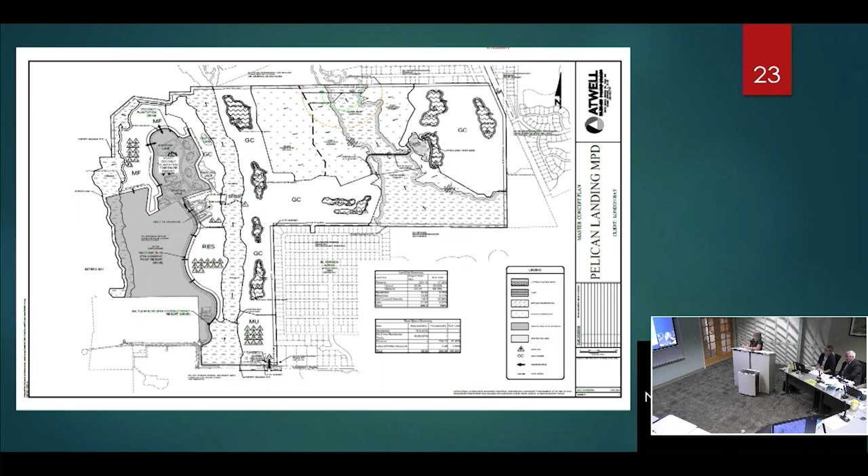So the applicant went through the Lee Plan analysis. I'm not going to go super in depth because staff is in agreement with the applicant that they are meeting the Lee Plan when it comes to commercial design as well as residential. Public services are being fulfilled, there's visual harmony with the buffering, and they've been sensitive to where they're placing height variations on the site compared to surrounding uses. It's my professional opinion that the applicant is meeting the land development code and the Lee Plan for approval. Thank you.

I don't have any questions at the moment. Okay, you can take your seat.

Thank you. We're going to turn now to public input. I'm going to call the names on these sheets. If not everybody filled out a sheet, I will invite anyone else in the room that wishes to speak. So we'll start with Ann Kramer.

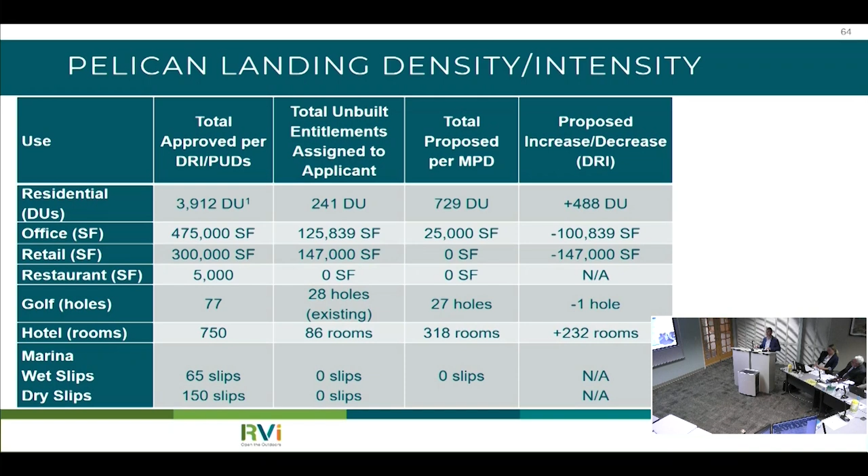And the U.S. Fish and Wildlife Service, in responding back to the Corps, issued what's called a biological opinion, and it covers the species that were potentially impacted—again, not including the Florida panther. They provided that information back to the Corps, and that was all incorporated into the Corps permit when it was issued.

One more aspect on the Corps permit: all of the wetland mitigation for impacts that were authorized by the permit were previously completed. That includes off-site purchase of wetland mitigation credits, and also all of the conservation area that we showed on the maps as part of our presentation. That's already been completed.

So essentially, I know our project team has already spoken to this, but this is pretty cut and dry. You've got your conservation areas that are already in place, that have already been maintained and will be maintained in perpetuity, and you've got your development areas. It's pretty cut and dry at this point.

With respect to wildlife, specifically the gopher tortoise, the reason I put the map up with all the burrow locations is to let you know and put on the record that those burrows within the development footprint, related to the golf course renovation project, have already been addressed through a permit issued by FWC. There were a number of burrows, yes. We observed physically during our surveys 3 tortoises above the ground. That's not abnormal even in a high-density gopher tortoise population, because gopher tortoises spend most of their time in their burrows. So it's not abnormal to not necessarily see a lot of tortoises walking around, even in a high-density burrow area. So I believe the tortoise issue's been addressed.

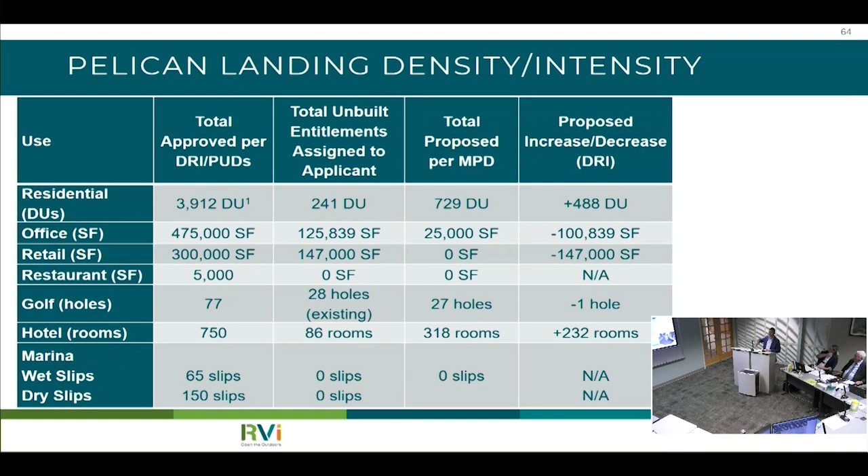Lastly, regarding concerns brought up about mangroves, I think Ms. Workman already addressed that in her presentation. We could put up the slide if need be, but that Water Management District conservation area spans pretty much the entire western boundary of the project that's already under conservation easement. A portion of that contains mangroves. They can't be impacted because they're under conservation easement, so there will be no impacting that area and no relocation of mangroves associated with this project. I think that was it from environmental.

Hello again, Jackie LaRock for the record. I'm going to talk a little bit about the surface water management side and a couple of the comments that were made. As far as the flooding comments, the core fundamentals and the math that we do are to prevent off-site impacts. So we contain all of our stormwater runoff, we hold it on site, and then we release it at a much slower rate than what could be there today, because it's very controlled. We're in an impaired water body basin, so the restrictions on this project are higher than some of the others throughout the county.

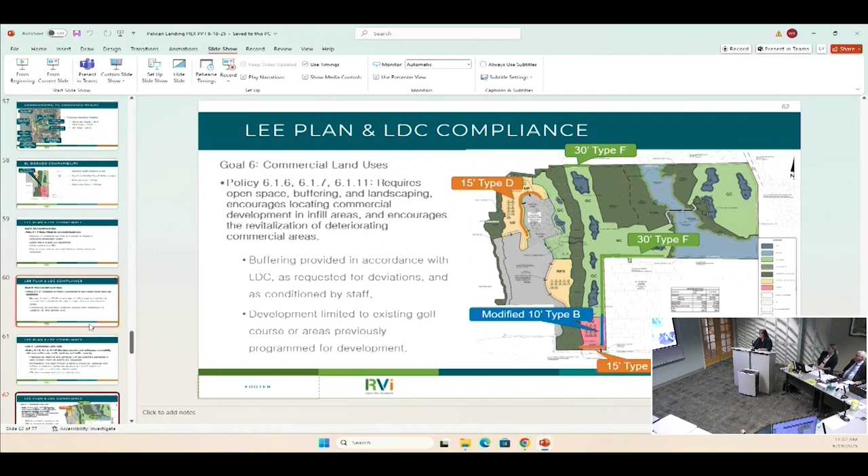There are storm surge issues in this area. We're right on the bay. FEMA recently just released new maps where all of the elevations have been raised. So yes, the second gentleman was correct, you do have to bring fill in. You have to meet all of the FEMA requirements. Finished floors have to be base flood elevation plus 1 foot or 2 foot, depending on what kind of funding you get. And there are rules and requirements in place that the federal government, the state government, and the local government has put in place that we follow.

On water management, one thing I didn't mention is this project does have a CDD on it, so it does have an entity that will own and maintain the water management system in perpetuity. During the break, Lisa with London Bay was talking with a third gentleman. They actually share the same CDD manager, and the information has been given to the third speaker of, here's our CDD information, please let's coordinate, let's talk, let's make sure that whatever information we have that's public, you guys have as well.

One clarification that I do want to make on irrigation, the Lee Plan consistency states that irrigation shall not be used with potable water. That is the intent of this project. What happens with the location, since we're right on the bay, is we have saltwater intrusion. So with every project and every DO that we do, we complete a saltwater intrusion study, and that gets submitted, and then we make that determination with our hydrologist and our experts for groundwater - can we use the surface water and or a combination of groundwater to irrigate the property, or do we need to do that with potable water? Bonita Springs Utilities already knows this. We have the Bayview residents, and Bonita is using potable. So those steps are made during the development order process, but every step is documented and studied to make sure that we are consistent with the Lee Plan and consistent with staff as we go through the steps.

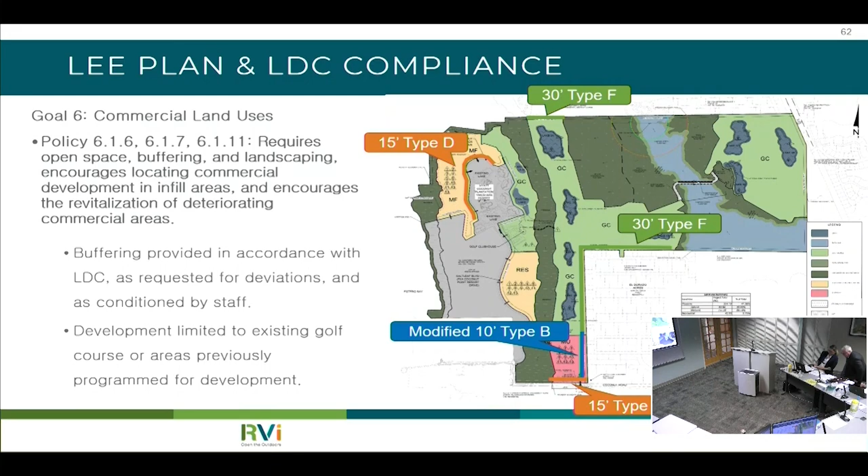Does staff wish to make any comments? I have a couple things about the interlocal agreement and contacts, like how we contact the public. Come forward. I just need to put a map up.

I just wanted to add some clarity because there were some comments. We have a DRI application and a DCI application. For the DRI application, the applicant is required to notice everybody in the DRI, so the applicant notified 4,400 and some people about the application. The DCI is required to notice 500 feet; those who live within 500 feet of the zoning application are notified of the rezone. So there's a difference in how this works. A lot of the emails staff received were about the DRI, and because it's running piggyback with the DCI, they commented on both.